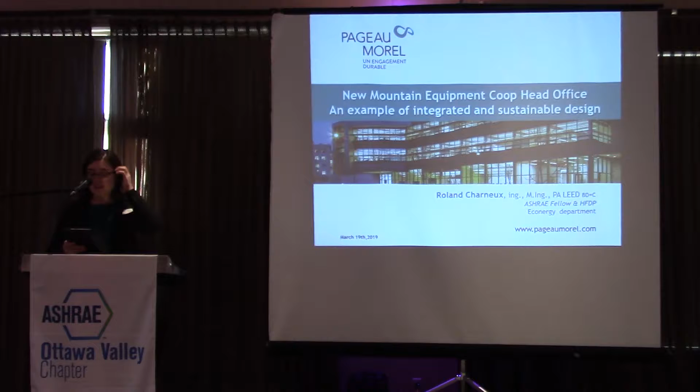I'd now like to call upon Adrienne Matani to introduce the guests. So the guests for the evening are Kevin Belusa, Eric Hilkeast, Ryan Harani, Frederick Dion, Connor Patterson, James Owen, Marco Pillock, and Jim Watson. Thank you very much, Adrienne.

Now I'd like to call upon Andrew Brown to introduce the new members. It gives me great pleasure to introduce the following new members: Michael Bartko, Matthew Levesque, Alex Lapointe, Kareem Sadi, Sarah Abraham, Zarna Kakadia, Muhammad Wakas, Jean Cardinal, and Mafonbon Etukudu. Thank you. Thank you very much, Andrew.

Now, I mentioned earlier that Aaron Dobson is not with us tonight. Aaron is our Research Promotion Chair. And he did want me to pass on that so far this year we have raised 58% of our goal. Our goal this year is $34,300. Adam Moons, who's at the back, is raising funds for RP tonight and selling raffle tickets, which are 4 tickets to the Senators versus Buffalo on the 26th of March with 2 parking passes. They're really great seats, donated by Walmart.

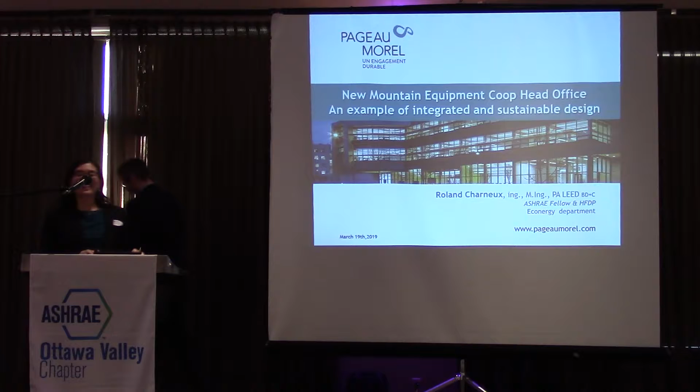Thank you. Hi again. So last Wednesday we had a seminar put on by Ralph Kaizen, who is out of the Vancouver area, but he works for ASHRAE across the society, and he does leadership weekends. And we were very fortunate that we were able to get him out here to Ottawa, and he gave a presentation on business development. We had great attendance, and we were in the master boardroom.

And he talked to us about different ways to approach business development, some different key strategies to go over, as well as just how to communicate with different people, because a lot of business development is communication, and that's a great skill for engineers to have. So it was a fantastic presentation, and it was great to have Ralph in town.

I'm also going to briefly talk about an upcoming seminar we have coming up next month. It's going to be put on by Bjarne Olesen, who was ASHRAE Society President last year. He's going to be coming to Ottawa on April 17th. It's a Wednesday. It's a full-day seminar, and it'll be on the European approach to decrease energy consumption in buildings.

So he's from Denmark, and he's actually traveling here to Ottawa, and then he'll be traveling around the US and Canada afterwards. But it'll be really interesting to get kind of a primer on the European approach to how building design works and how they work towards decreasing the energy consumption of them. All right, thanks very much.

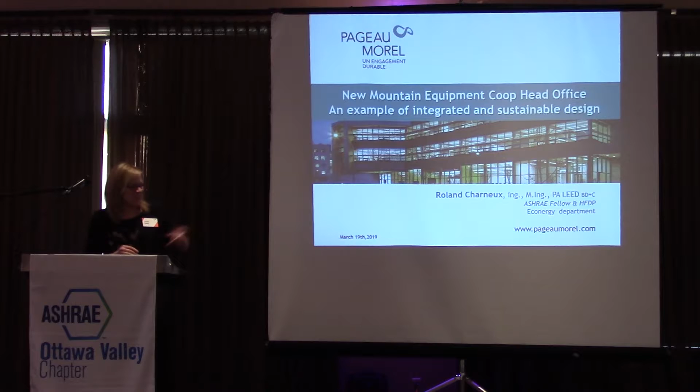Thank you very much, Jenna. And Clark, we'll still see you here, right? Yes. So I get to travel Canada coast to coast doing training for the next 3 years. Well, fantastic. But the third Tuesday of every month, it's on my calendar.

I would especially put a shout out though to the students to check out the tabletop and see some of the advances in the industry. I mean, it's a cool opportunity just to get some exposure and see some of the new tech that's out there.

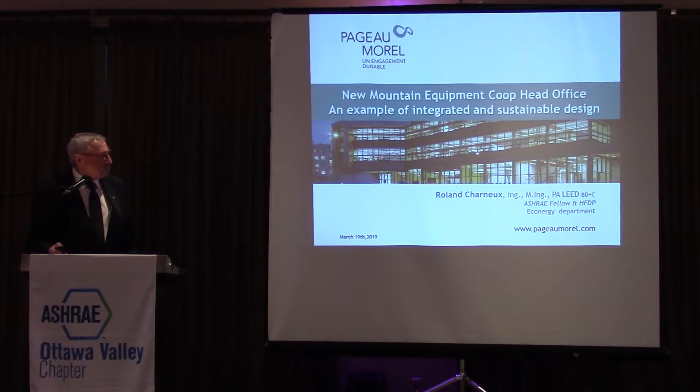Today's presentation is about Mountain Equipment Co-op's new head office in Vancouver. The agenda of the presentation: first we'll go through a general description of the project, then we'll discuss daylighting and its impact, the building structure, electromechanical systems, and finally the results of the project.

I want to give special thanks to Hugh Cochlin, the architect of the project, who is with Proscenium Architecture in Vancouver, and Tanya Luthi, who was the structural engineer on the project for Fast and Epp. At that time she was in Vancouver. Actually she's heading the office in New York City.

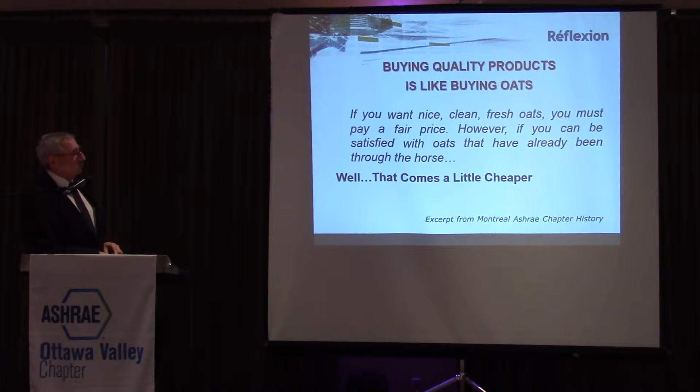The second reflection that I always have is the impact of the comparison between the buildings and cars. If today we decide to have cars which would consume 50% less energy than the actual cars, it's technically feasible. And in 10 years from now, we would reduce the energy consumption of the cars by 50%. But what about the buildings? What can be done if we decide to take a decision today? In 10 years from now, we cannot reduce by 50%.

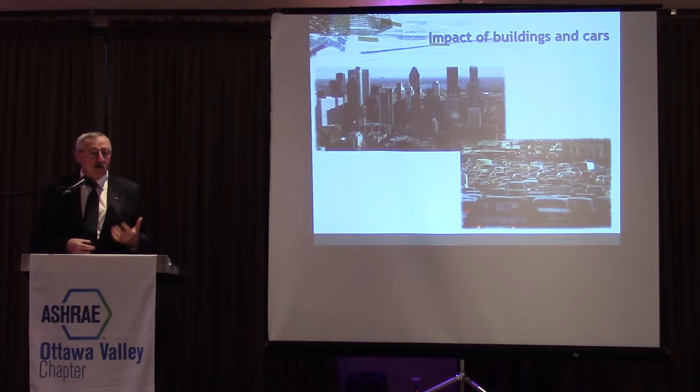The idea of the building is there for so long time that we have to pay attention on how we design the building. The buildings are there for 50 years, 100 years, so we have to pay attention how we design the buildings to make sure that they are efficient.

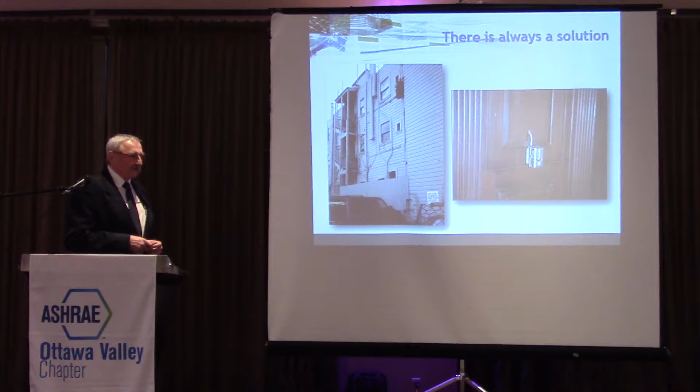There's always a solution if you want to add drainage to a building or if you want to add a thermostat, but I'm not sure that the results are very well accepted by the neighbors or by the occupants of the building. There's always a solution if you want to cap the pipe. In fact, it's in the Mountain Equipment Co-op project that I took this picture. We had to cap the pipe because we were doing some dirty work, so we found a solution quite quick, a fix solution.

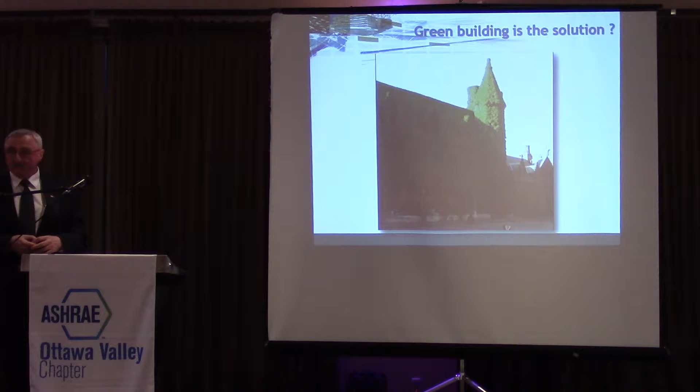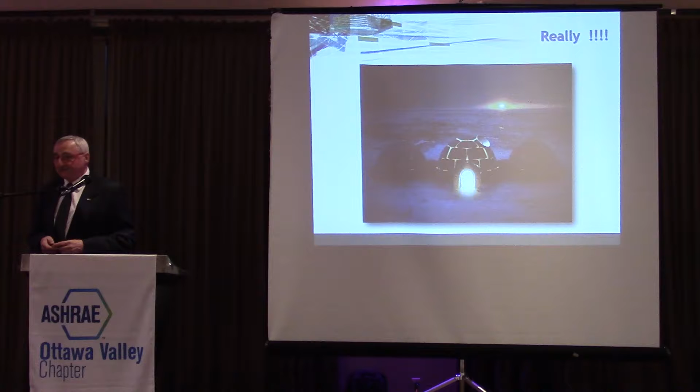So maybe the green building would be the solution. And there's all types of green building. That one is green. That's an Ottawa building, in fact, which is all covered by green plants. Or maybe net zero building would be the solution. That's the net zero building that stays for many years. But maybe it's not, depending on what you are doing in your building. It can melt during the next few hours.

So the reflection here is that we engineers are responsible for the situation where we actually are in the design of the building, because we always like challenges. We always find solutions for the problems. When the architect gives us some problems, we were always able to solve it. If there is a building 100% glazed, we are able to heat the building. If there's no window in the building, we are able to light the building. If there's a column spacing of 40 meters, we are able to find a solution to calculate the beam. So we always found solutions to the problems that were posed by the architects.

So why is an integrated design process needed when doing new buildings? We find out that a sequential approach doesn't give the optimal solution. Additional technologies do not solve the problem. We can add control, we can add technology, we can add cooling. We always multiply the technologies in the building, and the buildings were not as efficient as they should be.

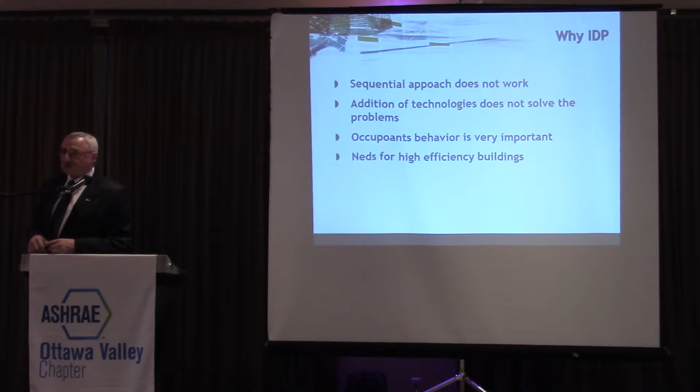And also the occupant behavior is very important. There are studies that have been done with two exact same houses, and the consumption of one could be twice as much compared to the other, depending on the behavior of the people, how they behave in their environment. Needs for high efficiency buildings: we need more and more high efficiency buildings. The climate concerns everybody, and we have to work hard for the next years to solve the global warming of the planet.

Why integrated design? Occupant comfort is mandatory, and more and more. When LEED was developed, it was to reduce the impact of the building on the environment. Actually, we have a new one, the WELL certification, which looks at the comfort of the people. We are not building buildings for the sake of it, we are building buildings for the people that will occupy them.

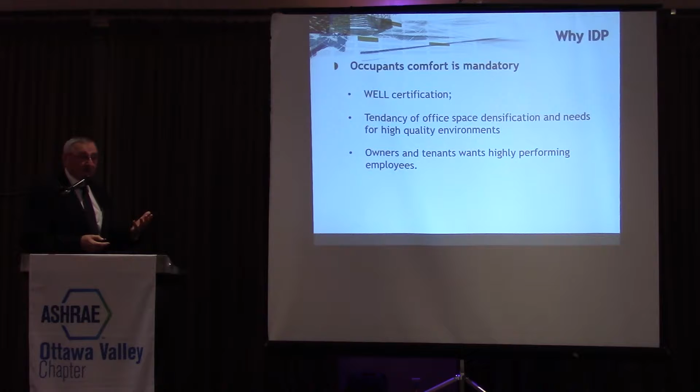The other fact that we see actually is more and more densification of office buildings. There's less and less space per person in the building. So we need a high quality environment for the people occupying the building. Owners and tenants want highly performing employees. The big expense per square meter of building is not the heating and cooling, it's the salary that you pay for the employees that you have in your building. So you have to give them very interesting environments to have them performing at a high quality level.

So we'll go through the general description of the project. The integrated design process is based on the life cycle cost of the building. It starts on day one with all parties involved.

What was interesting with this project, when we first sat around the table, there was no line drawn on the project. Around the table there was the owner, the architect, the mechanical engineer, electrical engineers, structural engineers, project manager, all around the table without anything drawn. That was very interesting to have everybody having a word to say on the development of the project, trying to optimize all the characteristics of the project.

The process considered the design, the construction, the operation of the building occupancy, the environmental impact of the building, and the end of life of the building. Even at the end of the life of the building, it can be reused for another function or be dismantled. So we try to see more than the initial use of the building.

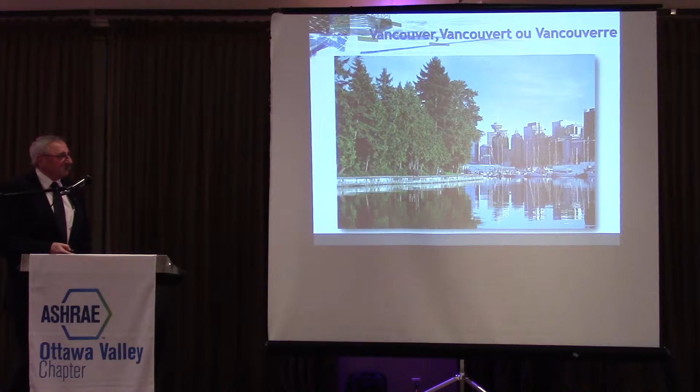The general weather data, Vancouver compared to Ottawa: for the heating degree days, Ottawa is about 4480 degree days, Vancouver 2670. So there's 65% more heating demand in Ottawa than in Vancouver. It's important to remember that.

We'll see how that's been considered and what's the difference in design of the building envelope compared to what we're doing year round. Degree days of cooling are much less in Vancouver, and the exterior temperature is higher for heating and lower for cooling.

Bright sunshine hours are 1784 in Vancouver and 2084 in Ottawa. The major difference is that the 1784 hours in Vancouver are mainly concentrated in the summer days, June, July and August. The rest of the year there's a lot of clouds and rainy days.

The site: we have downtown Vancouver, which is in this area here. The site is quite a bit further away from downtown Vancouver.

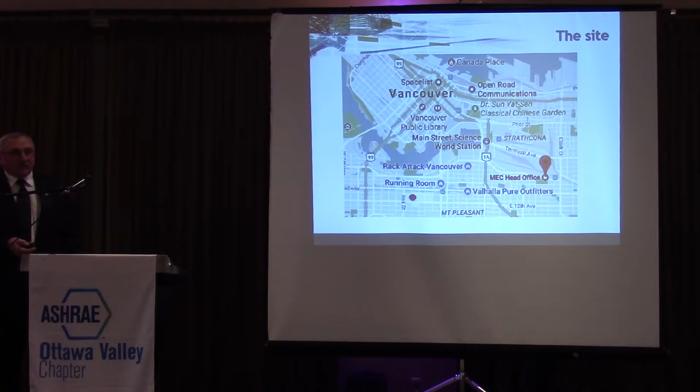It was a site which was already used by an old industry of fish transformation. That's the existing building which was here, an old industry which was transforming the fish for distribution.

And there's the Central Valley Greenway, the Great Northern Way here, and there was a parking just across the street. The site was an old dump, an old fill site, and when they started excavating they found all sorts of bones and everything in the ground. So the ground in this area is of very poor quality for structural purposes. The soil was very, very bad.

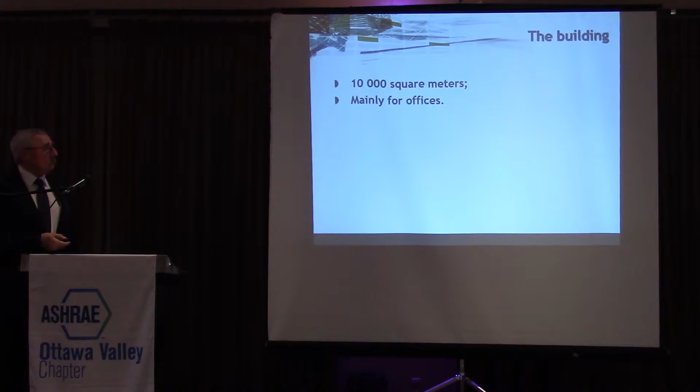The building, as described by Daniel earlier, is about 10,000 square meters, mainly for offices and other uses, with 370 employees in the building.

The main objective of the client for this project was occupant comfort. They were occupying a space that wasn't very bad, there was glazing etc., but they had to move because they needed much more space. It was too small and there was no way to expand where they were, so they had to find another location with more space. So they decided to build a new building.

But their main consideration was occupant comfort. They wanted daylighting, view to the exterior, indoor air quality, thermal comfort, acoustical comfort. So it was very dedicated to employees' comfort, and also energy efficiency, since Mountain Equipment Co-op tries to design very efficient buildings for new construction.

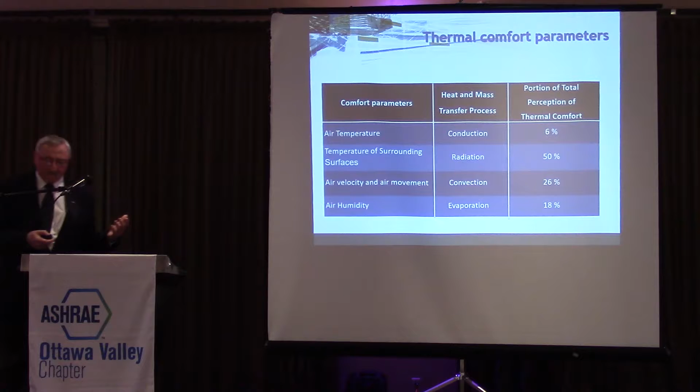Thermal comfort parameters are interesting to remember, and we brought it to the table also. What makes us comfortable in a room is not the air temperature, it's mainly radiation. We are comfortable in this room not because the air is at 21 degrees C, but because all the surfaces are at 21 degrees C.

So the radiation component is the main parameter of comfort when we are in a room or space. Air velocity, movement and convection around us account for about 26%. So when there's an exterior wall with a cold surface, we rapidly become uncomfortable due to radiation, which is the major component of our comfort. So we have to work to have a higher exterior surface temperature in winter to make sure people are comfortable.

Now about daylighting and its impact.

The first step was to reduce the energy consumption of the building, starting with reducing the electricity need, because electricity is a very high value energy. Electricity can be used for lighting, welding, running motors, all sorts of things. So using electricity for heating is not a good way to spend this high quality energy. That's why the first step was to work on daylighting.

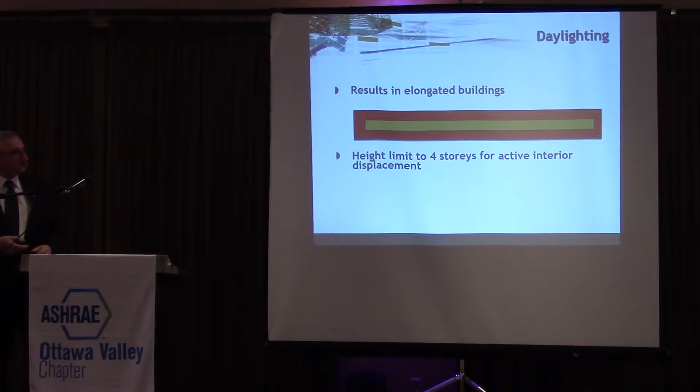So daylighting also defines the profile of the building. It defines the daylight penetration and defines the height of the building. In this case, for the 3 stories above ground floor, the height was 4.5 meters, and the ground floor was established at 5.2 meters.

So daylighting defines the length of the building and the height of each story to maximize daylighting. We ran all sorts of simulations to ensure sufficient daylight penetration. Instead of having one very long building, it was decided to have two parts interconnected together, rather than a single elongated building.

The central part was the general communication area, with the stairwell in the center connecting the different departments and stories of the building. There was also simulation done to see the daylighting penetration and how to reduce glare on the different stories.

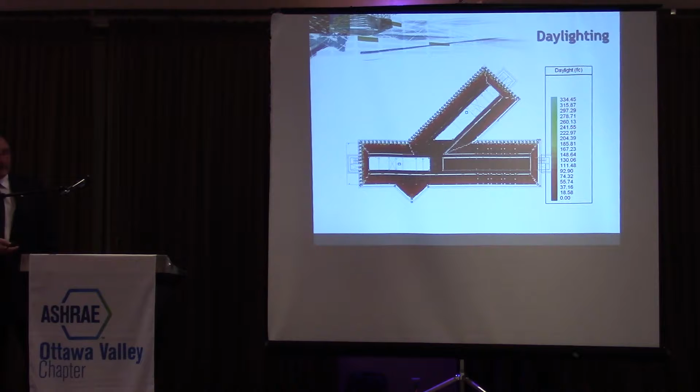So the next step, once there was enough daylighting, was to try to reduce direct sun gain in the building. This meant developing outside overhangs to reduce the penetration of solar rays and the resulting heat and cooling loads in the building. That was the next step worked out to stay as passive as possible.

So with daylighting, we developed the windows, but windows create problems in summer. We solved this first with exterior overhangs, and the second step was to install roller blinds.

The roller blinds are split into two parts. For the upper part, it was decided to have motorized blinds that close when there's direct sunshine and open when there isn't. If you look at different buildings tomorrow morning, you'll see that almost 50% of the blinds are closed, because when there's direct sunshine people close the blinds and rarely open them back up.

So it's detrimental to the efficiency of the daylighting if the blinds stay down. If you want very efficient daylighting, you have to motorize the blinds so they go up automatically when there's no direct sunshine.

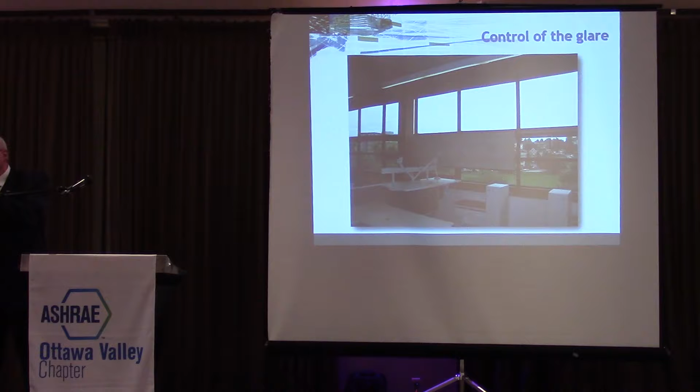So that's the end result of the daylighting. You see the large windows, and there's operable windows for natural ventilation. We will discuss this further in the presentation.

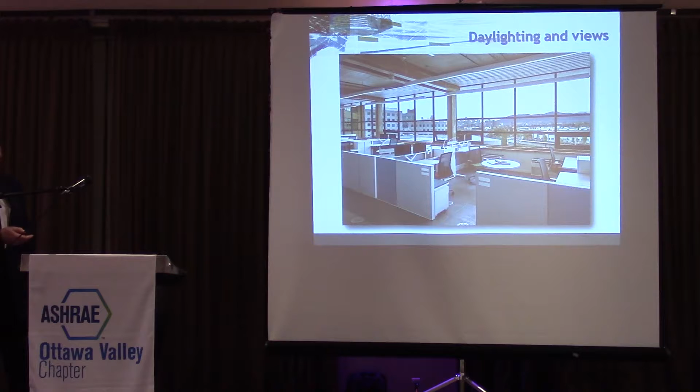As said earlier, when developing the building for daylighting, if we compare it with an optimal building with a square shape, there's 53% more perimeter with the daylighting, with the elongated shape. That's never taken into consideration when we do energy simulation, because the reference building is the building we are doing.

So there was discussion with the team, and we said to the owner it's not the best way. For a traditional building with 40% glazing, we'd have a UA factor of 8,264. In our case before improvement, with 47% glazing and 53% more envelope, we had a UA factor of 22,744 — almost 3 times more losses with our daylighting decision.

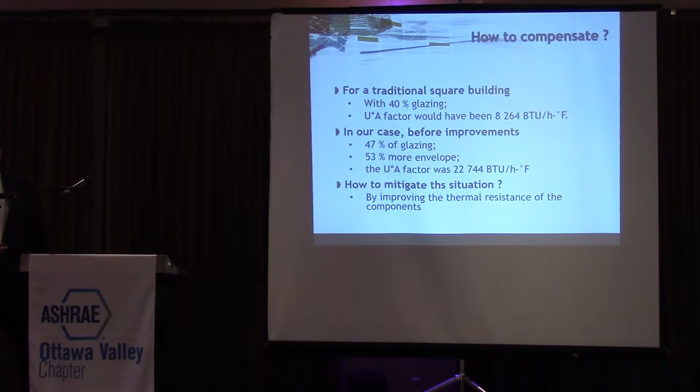So we tried to discuss how we could improve this situation. We worked and made simulations, and we saw that heating, even in Vancouver, was the biggest part of the energy consumption of the building.

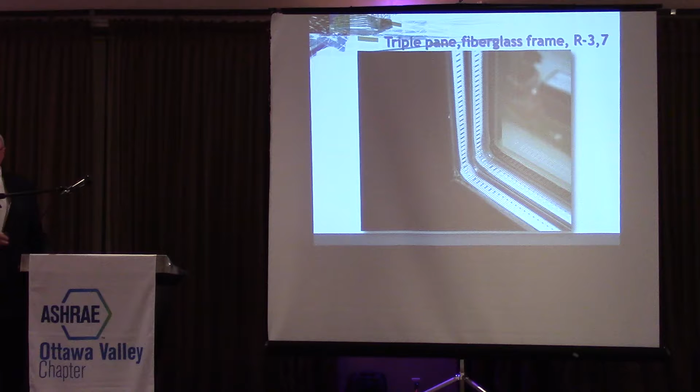So the first step was to try to improve the windows. It was decided to go with triple pane windows in Vancouver. We know the climate is quite mild there, so we decided on triple pane fiberglass frame with an R3.7 thermal resistance, including the frame — that's the global average of the whole glazing and frame thermal resistance.

To justify this decision, we looked at what would be saved. With these high efficiency windows, we saved 24 tons of heat pumps for $60,000, 7 boreholes of geothermal, and 150 square meters of radiant panels for a saving of $178,000. For the 2,100 square meters of glazing, it was $85 per square meter, and the additional cost for triple pane was $86, so it was a wash. The savings in the mechanical system paid for the triple pane by itself, plus we had an annual saving of $7,100. So it justified going with triple pane glazing in this case.

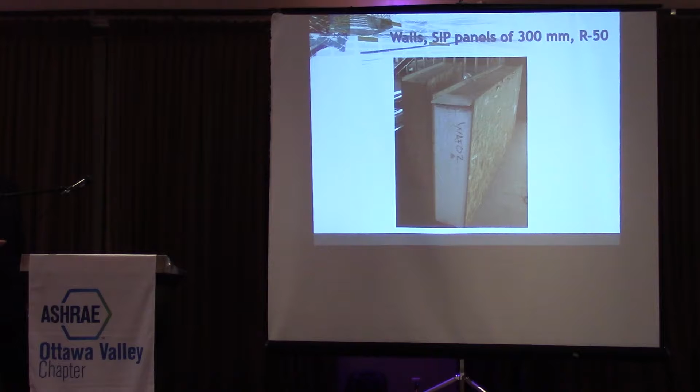For the walls, it was decided to go with structural insulated panels, SIPS panels. It was not used as structural, just as part of the wall. It was decided to go with 300 millimeters or 12 inches of insulation, R50 for the walls — quite a step to improve the envelope of the building.

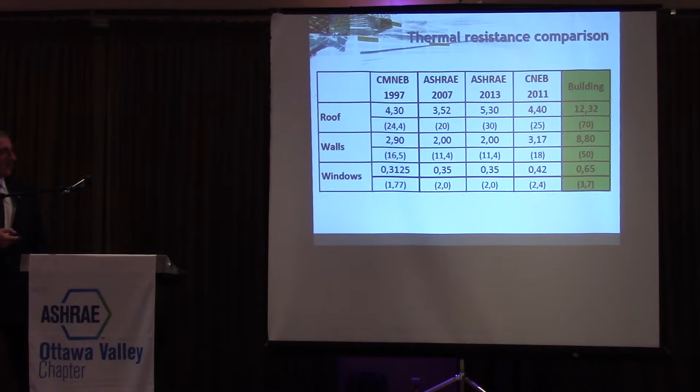The windows are 0.65, so about 1.8 times better than reference windows. It's a big challenge to improve — there's a limit. The availability of high efficiency windows is limited, and I think there will be some improvement in the future in that field. That's a big lack in the building envelope, the windows.

So now looking at the building structure of the project, again around the table there was discussion about what we should use. Should we use wood? Should we use concrete? Should we use steel with steel deck and concrete on top? Or should we use steel with hollow core prefab slab? So there were 4 options evaluated and costed.

There was not a big difference between the different options — about 2.5% difference in cost. What made the decision easier was the weight of the building, because with all the options except wood, we had to put piles. The ground was of very poor quality, and if we went with concrete or steel with concrete slab, we would have had to install piles, which would have been quite expensive.

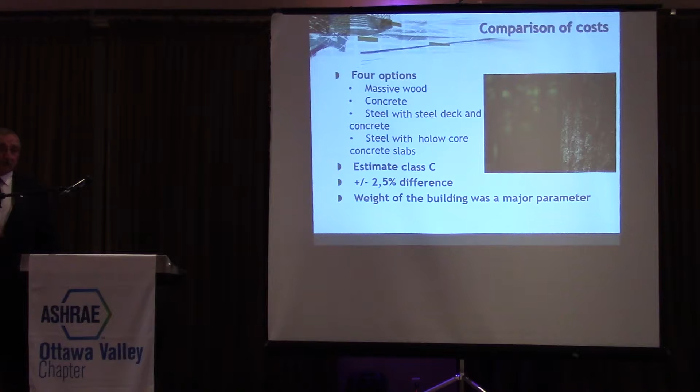So the decision was to go with wood. There were 2 reasons: the cost of the piles involved, and also that wood is available locally, plus the sequestration of carbon with wood construction. So the decision was to go with wood.

And the wood construction: the basement and the ground floor are concrete, and then the rest of the building is wood. The 3 and 4 stories are wood, with columns of wood and beams which are also wood, and we have the columns, and there are beams on each side of the columns every 20 feet. It's a 6 meter by 6 meter grid for the building.

And you see that the beams and the columns are protected from the rain, because there's quite some rain there in different periods. And the floor comes in what we call wood slabs, which are 4 feet by 40 feet long. And they are installed staggered, so there's a 20 feet staggered installation of the wood slabs.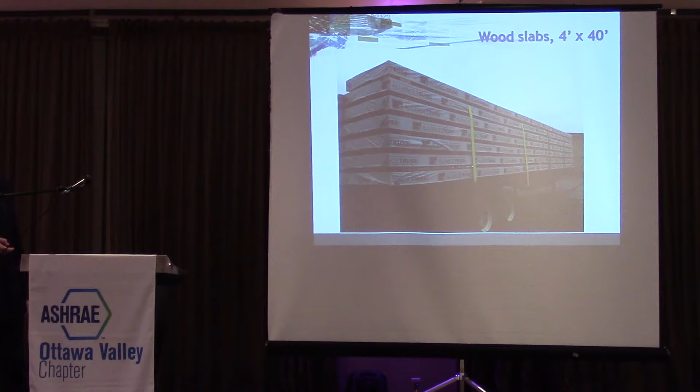And it's not cross-laminated timber. Cross-laminated timber is timbers which are in different orientations. These ones are nail-lams, so it's 8-inch planks which are nailed all together to create the slabs. Again, there was the cost analysis that was done, and it was cheaper to have these nail-lam slabs done instead of CLT in this case.

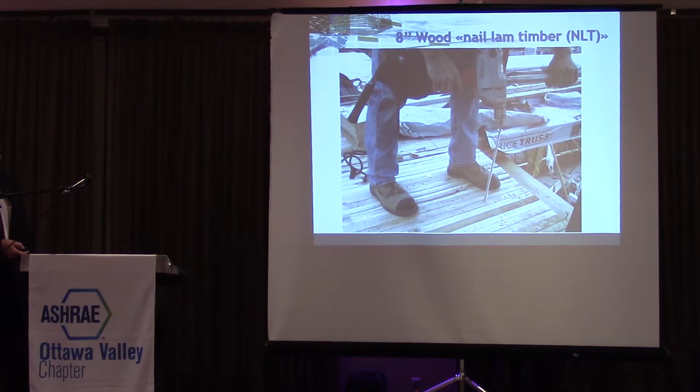And you see the screws that drive down to the beam. So you need some quite good tools to put these screws in place. So you see the different slabs which are installed, and you see here the columns that will go through, and you see the two beams which are on each side of the columns, and other columns on the other side.

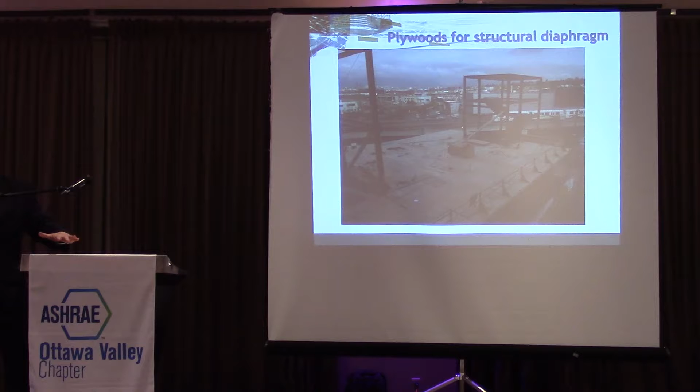And here the next step is to put plywood on top of these planks to create a diaphragm, to have all these slabs work together and make it as one floor, one slab. So the next step was to put all the plywood on top of the planks.

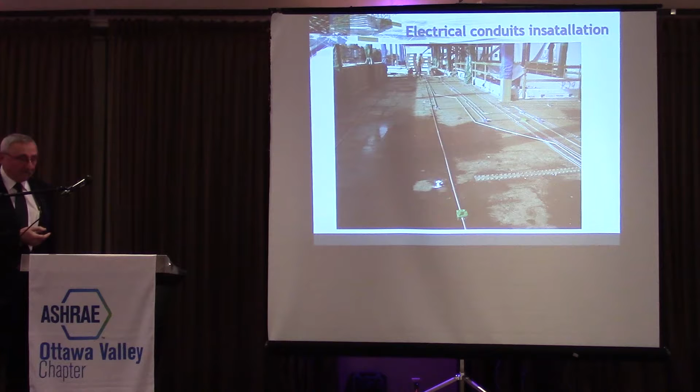Then it was decided in the discussion to have a plenum, to have displacement ventilation in the floor. But as soon as you use this space as an air supply duct, it has to be fireproofed. It should not be combustible. So the decision was to pour concrete on top of the plywood. So before pouring the concrete on top, we decided to put all the conduits for electrical distribution and data distribution in the raised floor.

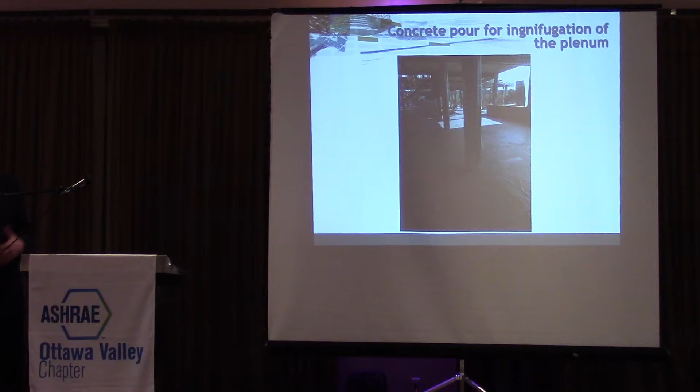Then the concrete was poured on the floor, so it makes also a neat surface for the workers to roll their equipment on. And it was quite easy to have them work on the surface.

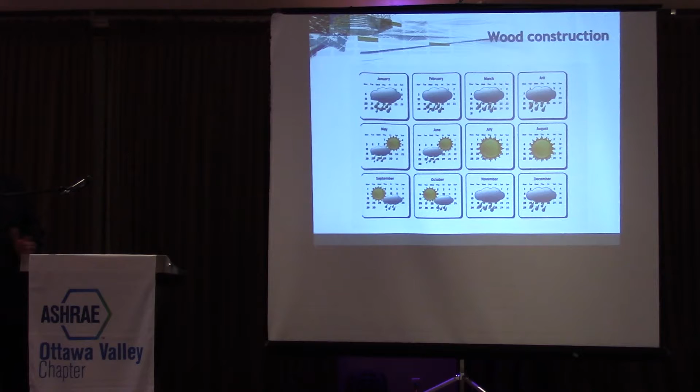Then it's wood construction. There's some rain. There was some schedule that was moved. So part of the construction, instead of being in the very nice sunny days, went later in the season, and there was a lot of rain. So it was decided to put some temporary weather protection. And that's a common practice in this area in Vancouver, to build big tents above the project, and it increased the number of potential working hours instead of having rain and delays of work. So that's a common practice there.

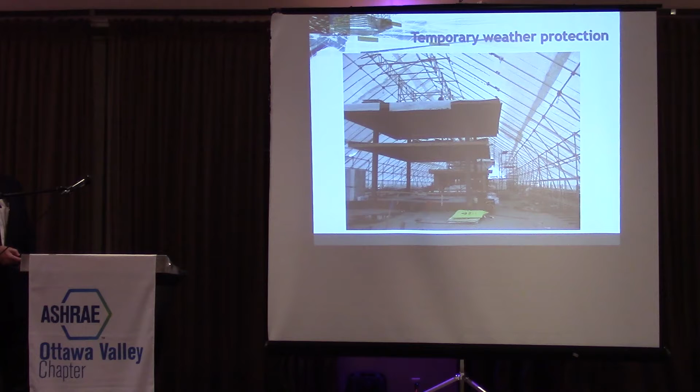So that's the roof level, and here what we see is the top of the ventilation tower, which we will discuss later on. It protruded above the roof surface. With potential rain impacts, there are some leaks, and there's some work that has to be done to correct leaking and stains on the wood. It's not a big deal. It's quite easy to sand it and to eliminate the stains on the beams. So that's about the structural part.

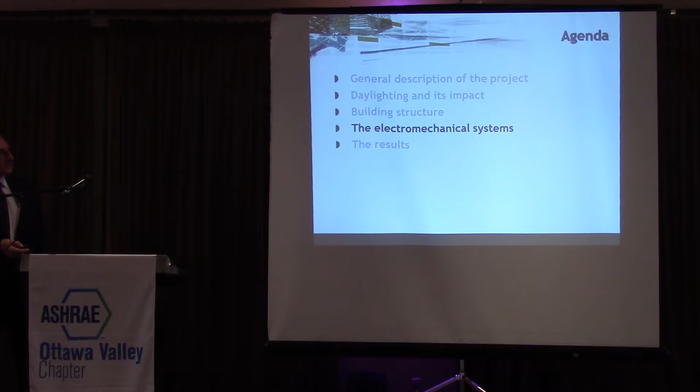Now the electromechanical system for the project. The conceptual approach that we had with the team first was to create a high efficiency envelope. And as discussed earlier, the envelope of the building is there for a long time, 50 years, 100 years, and it's quite hard to improve the envelope of a building. The mechanical systems, after 20 or 25 years, have to be replaced; they can be improved, modernized, the controls can be optimized, modified, but the envelope of the building has to be done well the first time.

So the first step, as discussed earlier, was to have a very efficient envelope, and at the same time, it reduces the capacity of the mechanical system. Then to use passive methods for lighting, as we discussed earlier, and also for heating, because in winter the sun is lower and it penetrates the building and helps with heating. For ventilation, we worked with hybrid ventilation. We will discuss this later on also.

And the next step is to recover all energy losses, energy from artificial lighting, from occupants, from daylighting, so all the energy sources, all the losses in the building have to be recovered for heating later on, or in other facades of the building.

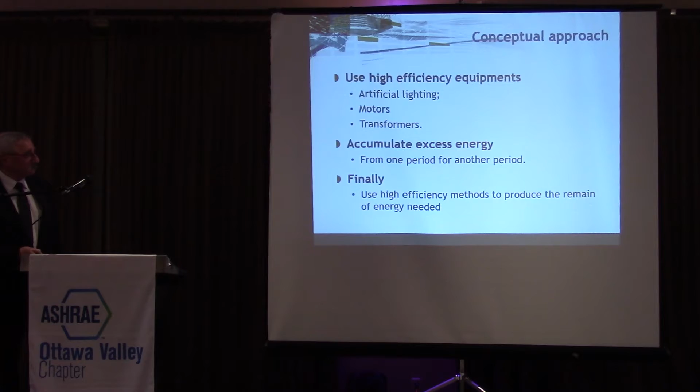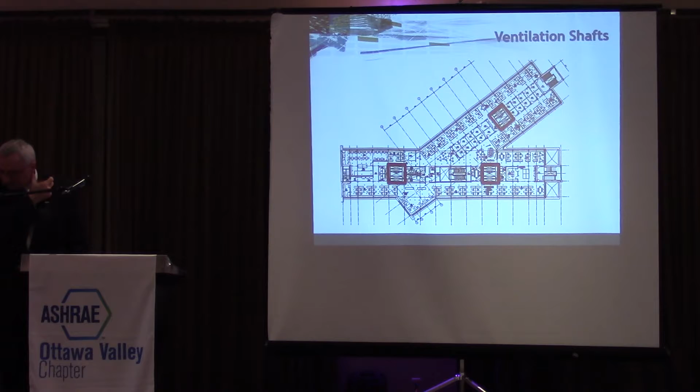with the same device. So what we try to do in this building is to have what we call natural hybrid ventilation. In discussing with the team, we decided to have 3 ventilation shafts in the building, 6 meters by 6 meters each. So we have very low velocity in these shafts, about 100, 150 feet per minute.

And with the wind blowing in the shaft, the air goes down in the mechanical room, is filtered, goes up in the raised floor, and then back in the other part of the shafts, and is exhausted on the other side. On the tower, there's dampers on each facade, and depending on the weather station, we open the dampers in the right direction, depending on the wind direction.

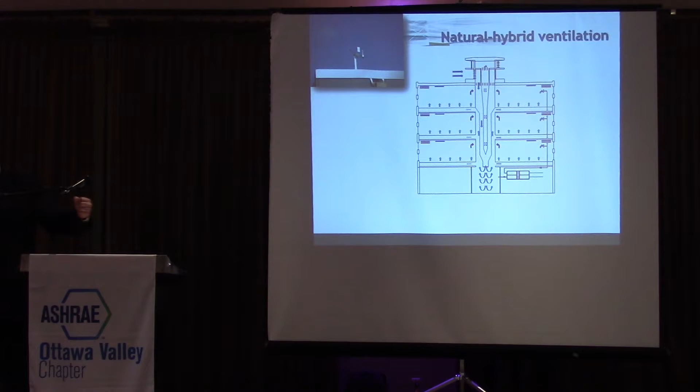And there's still fans because there are some days there's no wind, so there are small fans to continue the process. That's a very interesting process. At the beginning there was discussion about opening the windows, but opening the windows is not very democratic. The people nearby the windows open the windows, and the people in the center have no control. With this type of system, you distribute the air when the conditions are right, which is quite often in Vancouver, and you distribute fresh air uniformly to everybody.

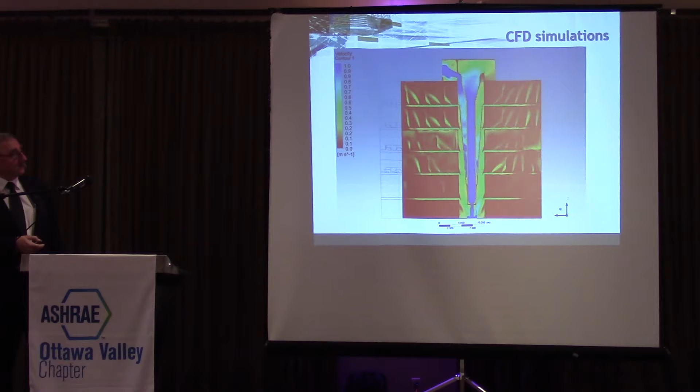So we made some CFD simulation to make sure that it would work, and it was working in the simulation, and it works in the field. The raised floor, which is used as plenum, is an 18-inch raised floor, and as seen earlier, the conduits poured in the slab feed distribution boxes with quick connects, which feed the service box on the floor. So when you want to modify the environment or displace the workstation, you don't need an electrician. You can unplug the service cord and move the service panel to another user.

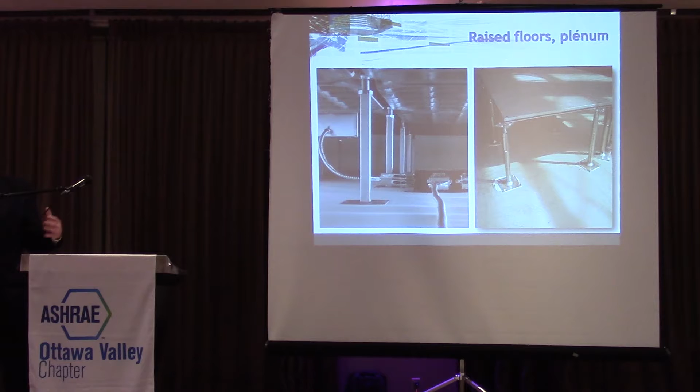Also the surface of the tiles on the raised floor is concrete, and there's no carpet. After discussion with the team, the owner decided not to have carpets for quality, to avoid dust and stuff in the air. So it was concrete, and there was a question about the noise. The people pay attention to the shoes that they wear to make sure it doesn't make noise. They are all employees of the same company, so they are very conscious about the others, so it works very well. Another concern: there's no perfume. People are not allowed to use perfume in there, again to maintain a high level of indoor air quality in the building.

The returns, you see, are again at very low velocity, about 100 feet per minute, and instead of having square corners, there are very smooth corners to reduce the losses, so there's almost no losses in the return system.

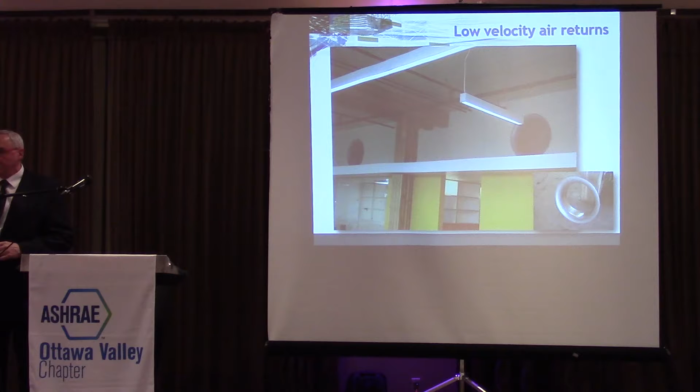You see also the sprinklers are in view, and again there was a long discussion: should we put the sprinklers in the raised floor and drill down to the other level? But at the end of the day, it was decided to put them on the same floor, because for retrofitting it would be easier to have access to the pipe instead of working in the raised floor and having water in the raised floor and contamination, etc.

So that's the radiant heating and cooling. So all the envelope load is taken by radiant panels. It's radiant sails, it's about 5-inch wide, and these panels are supplied by hot or cold water with 6-way valves, so there's no cross-contamination between the two networks.

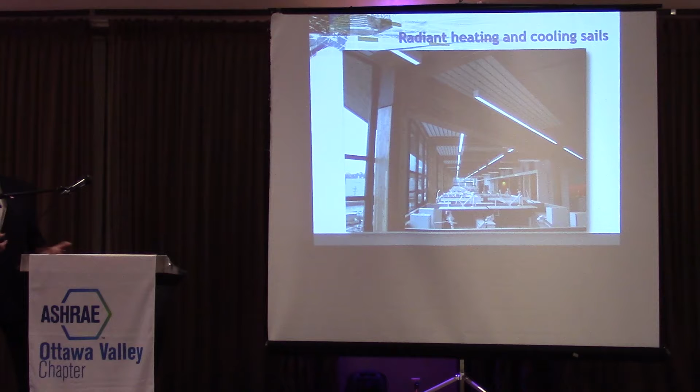So there's radiant panels which take care of the envelope load. The cooling and the heating of the envelope is taken by the radiant, and the internal loads from people and lighting are taken by the air supply from the raised floor.

We said earlier about the energy accumulation. To accumulate energy, what was decided was to use thermal tanks. So on the cold side, we have 4 tanks of 11,000 liters. So we have about 10,000 gallons of potential energy accumulation on the cold side. On the hot side, we have 1 tank. In fact, it could have been reversed.

It was decided to put it on the cold side because the process is that during the night we would cool the water which is in the tank to heat the building. And in the morning, the water would be cooled and would be used for cooling of the building during the day. So that was the thinking.

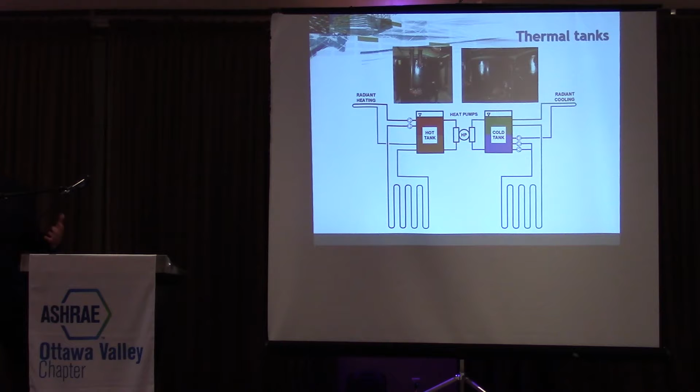So to feed the radiant panels, we use the hot water from the hot water tank, or on the other part of the building, we can use cool water to cool the radiant panels, to cool the building. And we have thermal tank regeneration. If one side is depleted compared to the other, we start the heat pumps to transfer the heat.

For the building, we have 8 heat pumps of 10 tons, so we have 80 tons. It's more than 1,000 square feet per ton. It's quite efficient. I think it's 1,200 square feet per ton in this building, instead of the figure that we often have of 400. So it's 3 times less cooling equipment in the building.

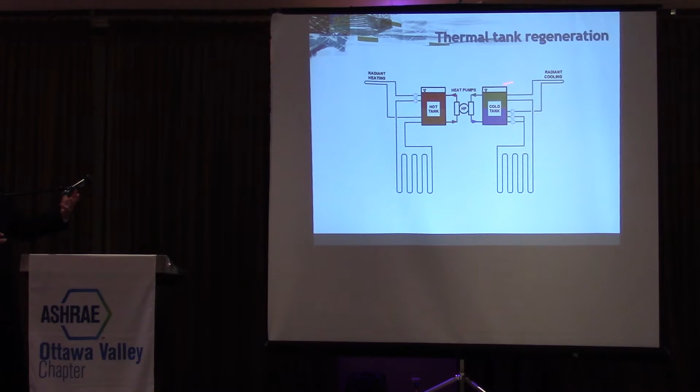So at a certain point, the hot tank will be too hot because there's not enough demand on the heating side, or on the cold side, it can be too cool because we have a lot of needs on the hot side. So if the hot tank is too hot, then we drive the hot water into the ground loop. So we have 21 wells to reject the heat in summer when there's excess heat, or in winter. In fact, it's shown as different wells, but it's the same wells which are used in summer or in winter.

So again, in winter, when we extract too much heat from the tank and the water becomes too cold, we start circulating this water in the ground to extract heat from the ground. And in this installation, there's no glycol or antifreeze. It's direct water, so there's no risk of contamination. And it impacts the number of wells, because we need more wells since the temperature that we draw in the ground is not as cold as it would be with antifreeze. But it was a decision that was taken not to have antifreeze and no risk of contamination.

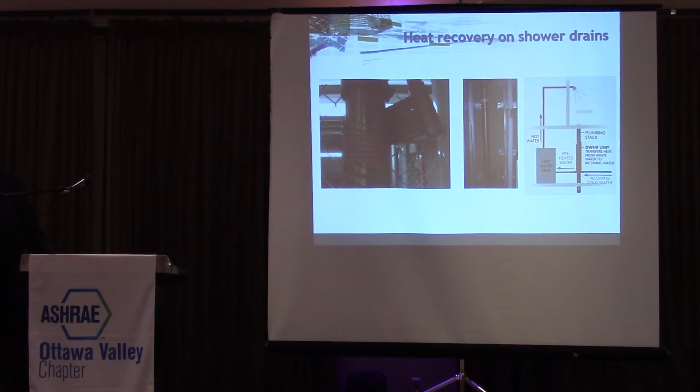We also have heat recovery on the shower drain. There's a lot of people in Montreal who almost every day come to work with bikes. There's a lot of bikers, and there's a lot of showers. So we put heat recovery power pipes, and the showers are on the ground floor. So in the basement we have power pipes to recover the heat from the shower drains.

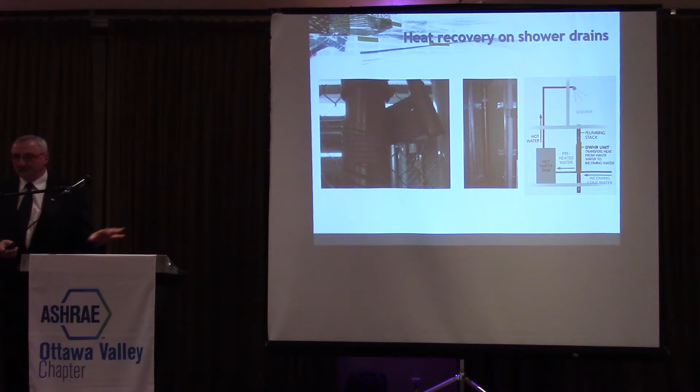Which is particular: in Montreal, they didn't know this device, they didn't accept this device, and we had to fight for several months to have them accept it to be installed. And they asked to have some notes on the pipe: do not repair if damaged or leaking, do not paint, cover, or alter. We had to put this sticker on the device, because they feared that the drain water would contaminate the incoming domestic cold water. So that's life. It's quite a simple device which is very efficient.

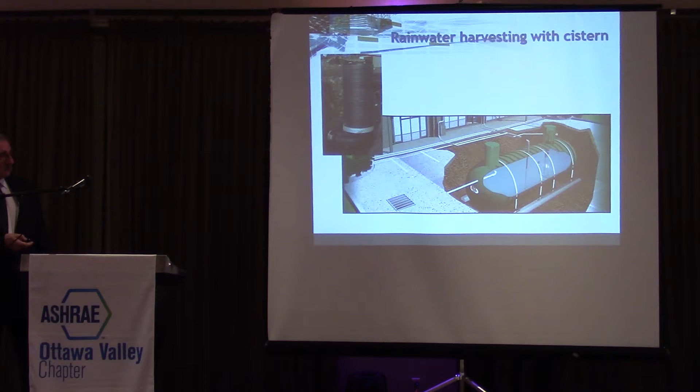We have heat recovery on exhaust air, which is quite common. On the water side, we have low flow fixtures everywhere. We have waterless urinals. We have rainwater harvesting. On the roof, the water is harvested, filtered, and then goes to an underground cistern, which is used to flush the toilets to reduce the need for domestic water.

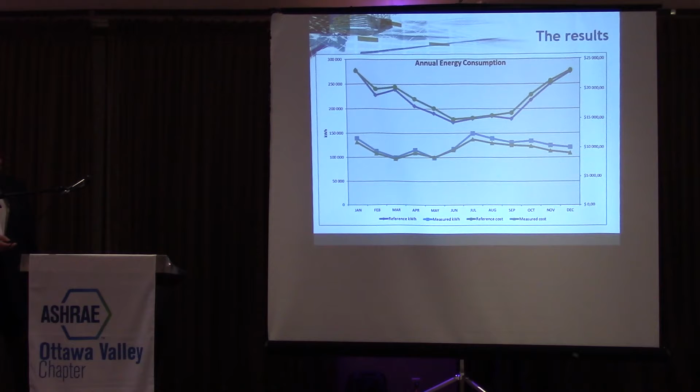Graphically, if we look at the reference compared to the proposed building, we see that there's a big difference in the heating. There's a lot of reduction in the energy consumption. Again, another presentation, the graphic, the reference, and the real building. What we see with the real building is that the demand is quite constant throughout the year, compared to having peaks and lower peaks. It's quite constant throughout the year.

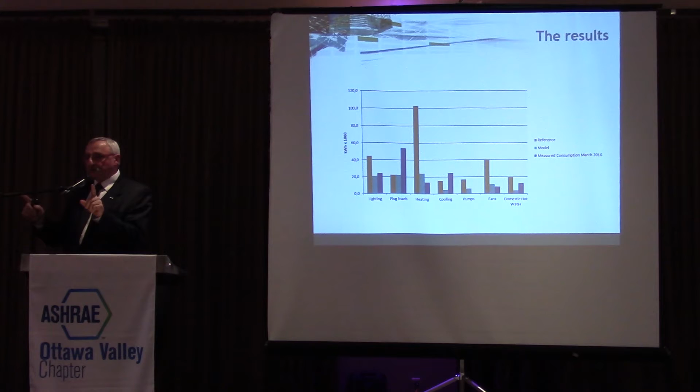Cooling includes part of the heating, because the heat pumps are measured. Sometimes they are doing heating, sometimes they are doing cooling, sometimes they are doing both at the same time. So the cooling and heating is not easy to monitor with the heat pump. We put sensors to find out if we were in heating mode or in cooling mode to try to measure separately, but sometimes it's both, so it's not clear where the energy metering goes.

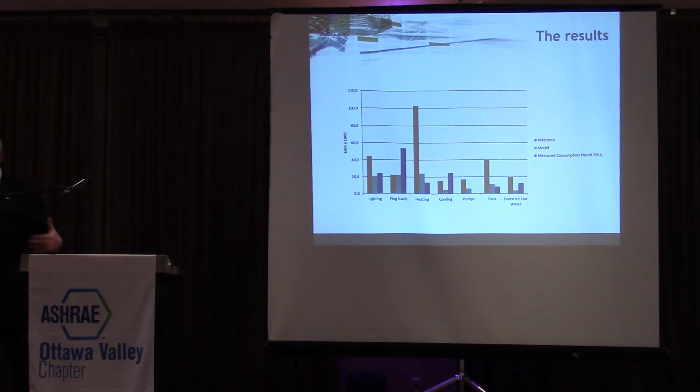The pumps are lower, the fans are lower, and domestic hot water, again, is lower than the reference, but it's quite higher than predicted. Again, it's the number of showers that are used, which was not the right figure that we had. There are more users of the showers than was predicted. But it's interesting to have the different metering. When we're doing a building, we try to have more and more sub-metering to find out what happened in the building and try to correct or understand or react to what can be done in the building.

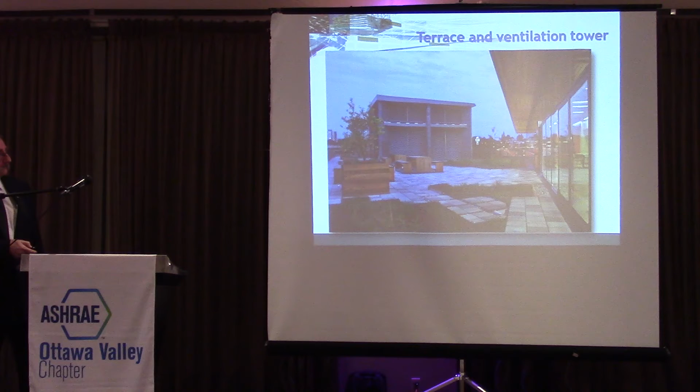So at this level, we go directly to the exterior terrace when they do some barbecue or some activities, and on the other side is the cafeteria. And here's the ventilation tower of the 3-story building. That's the access to the terrace, the 3rd floor from the cafeteria. That's the cafeteria, which is the low velocity return. And we almost don't see any mechanical system. There's no ductwork, there are no boxes, there's almost nothing.

So one point that I was discussing with Jim: they have some visitors from other buildings that want to do new construction, and they feel very, very good in the building, and there are almost never comments on the mechanical system because they don't see anything. But that's the real purpose of the building, to be happy in the building and be well in the building. It's not to see the equipment.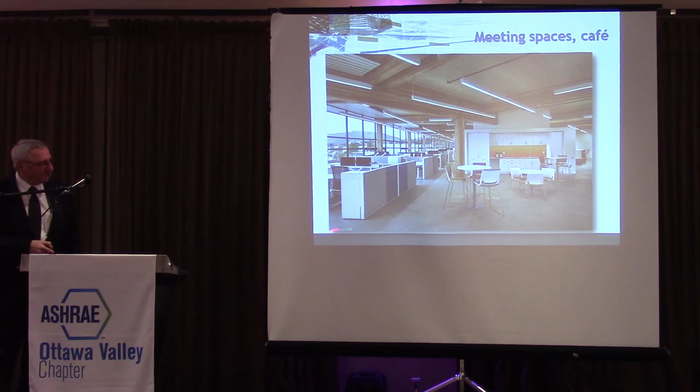And we see some floor diffusers, which are only manually operated. All the workstations have adjustable height. You could work seated; it's all motorized working desks. They have collaboration space at the intersection of the two aisles of the building. There are collaboration spaces. There are interior offices. Mainly the interior offices are for the buyers, because they are quite loud-speaking people at times.

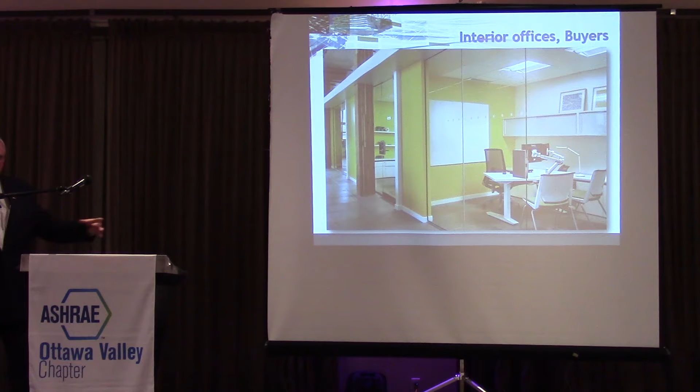So there was a request at the early stage of the design to make sure it would be confidential, and they have their closed offices. So that's in the central core of the aisles. That's the meeting room and the interior space. Again, there are closed offices or meeting rooms. The meeting rooms, again, are all glazed, so they take advantage of daylighting everywhere in the building.

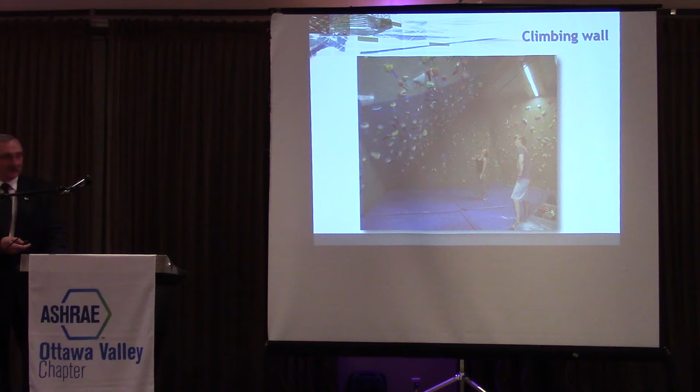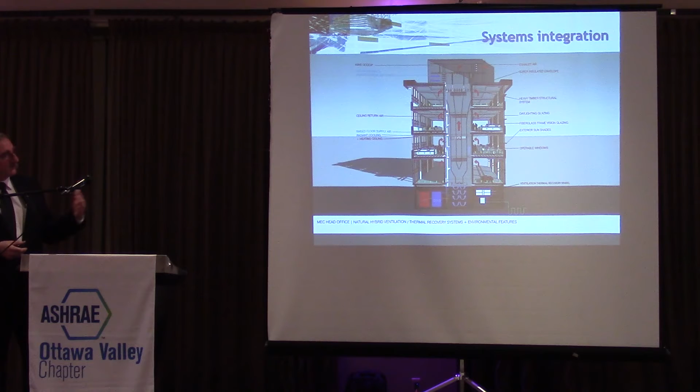That's a diagrammatic presentation of the different systems. The ventilation tower, you have the radiant panels, the thermal tanks, the heat recovery unit, etc. The raised floor. So that's an interesting integrated view of the systems.

We were discussing triple pane, and there's another building that has been built in Vancouver with triple glazing. It's a 31-story office building, 372,000 square feet, 240 million. It was financed by Credit Suisse, and they tend to think with a long-term approach. So it's interesting to see that they did it with a curtain wall of triple glazing. Seeing that done in Vancouver, we are questioning why we have so much difficulty selling triple-glazed windows in the Ottawa or Montreal area. I think we have to work hard to develop this.

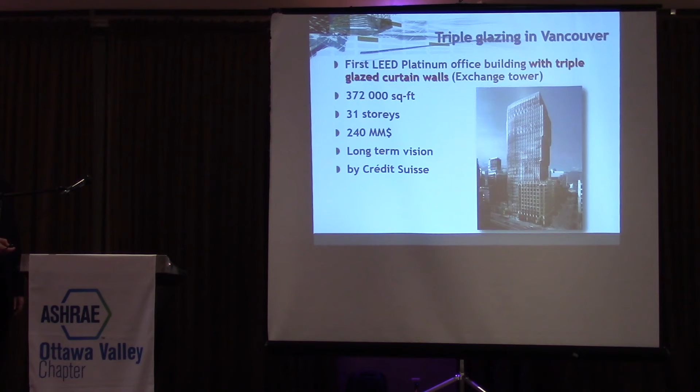In conclusion, what we see is that building envelopes are increasing with daylighting. That's what we see in the building designs we are doing. At the same time, there's a reduction in internal loads. Lighting is decreasing. When I started doing design, we had 25 watts per square meter of lighting load. Now we are at 8 watts per square meter, 7, 8, 9. So loads are decreasing. We are increasing the envelope, and we have less internal load to compensate for this. So that's a problem. Computers, again, are more efficient. Laptop consumption is reduced.

Building labeling will probably help. ASHRAE bEQ will develop and will help when buildings are labeled. People will pay more attention to what they are doing. I'm questioning here: what's the value of the building that we designed? What would be the value of a building which is single glazed? Actually, there are still some buildings which are single glazed. They don't work much.

Buildings are built for a very long period, so what we try to do when discussing with the team is: if the building is there for 50 years, we should design a building that 25 years from now meets the codes of that time. I don't understand why we are building a building which will be outdated when construction is finished. That's what we're actually doing, so it doesn't make sense. So we have to speak up with the team and try to have another type of reflection. We are building the future, not the present. We should think of the future. And that's what it is.

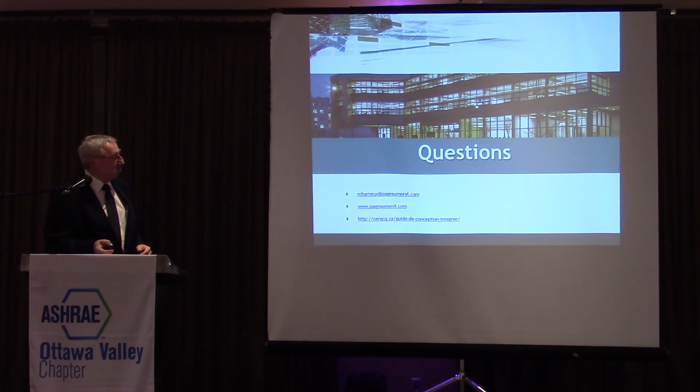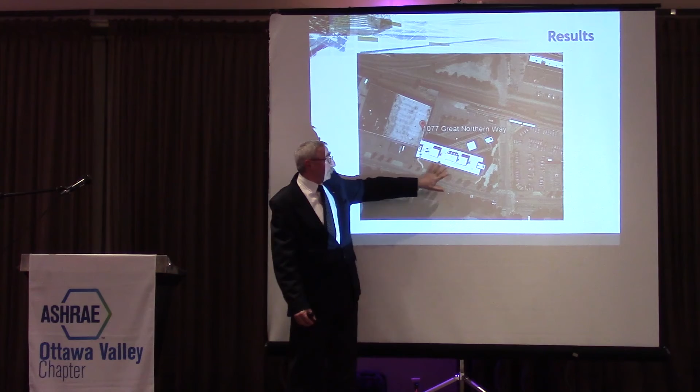Just further to that question — what was the final compass orientation of the building? What direction is north on the site? The south was there, the north was up. So there was no big glare control issue on this side, since it was not far from due south — an outside overhang handled it. But on the other orientation it was more problematic, with sun coming in the morning.

We looked at having vertical fins too, but at some point it didn't work out — we can't have everything in the building. That's an interesting point during this type of integrated design process: everybody has a word to say, but at some point you have to take a decision. Design is a lot of compromise. Every time you take a decision, it's a compromise — if not, you'd go straight on the road. But every time you take a decision, you take one direction and leave something on the side. What's important is to remember what you consider when you take that decision — you have to come back to the objective of your project. The objective of this project was the comfort of the occupants, the daylighting, the view, etc.

So when discussing options like vertical fins — does it impact the daylighting? Does it impact the comfort of the occupants? If yes, there's another way to do it. When the objectives are clear, it's easier to reach consensus around the table, and it's important everybody understands that, because otherwise we'd all be frustrated in the process. Having an understanding of why you do these things is very interesting for making a project like this happen. I think it's one of the most interesting projects I've done in my life, to be so deeply involved in that decision.

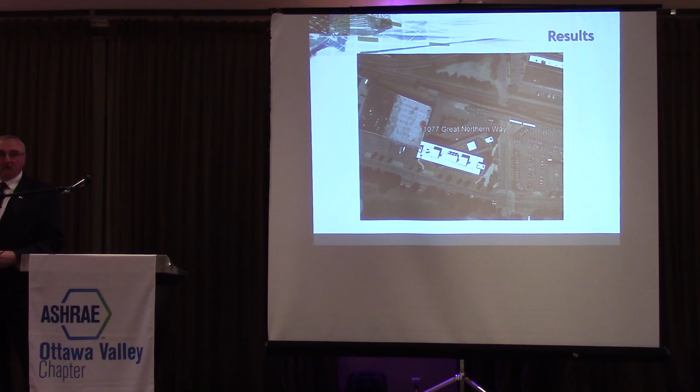The problem with the raised floor or displacement ventilation system, it works well in open area. As soon as you close a room, the air doesn't want to go there because there's an effort to be there, to go there in the closed room. So you have to put some fan to force the air to go in that room, and it's controlled by the thermostat to control the speed of the fan to bring the air in these rooms. So if you don't do that, the pressure in the room is very low, less than 0.1 inch. There's not much to do with that.

Any other questions? Three, two, one. Thank you very much.

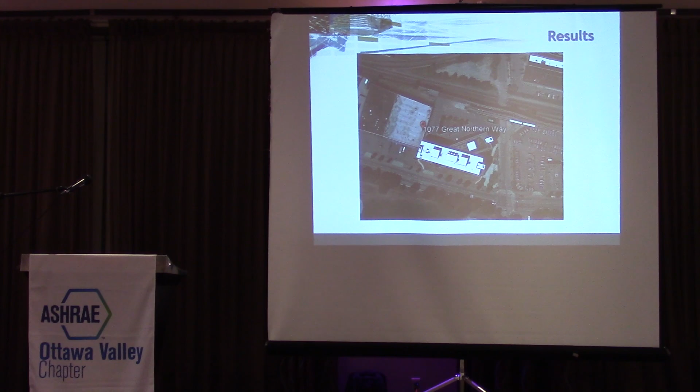Thank you very much, Roland. I thought it was very interesting to see how much more energy we put into heating and cooling here in Ottawa, but I was delighted to see that at least we get more sunlight. We did something, right? That's why we're here, right? No, thank you very much, Roland. That was fantastic, and some amazing ideas there that people can consider implementing into other projects.